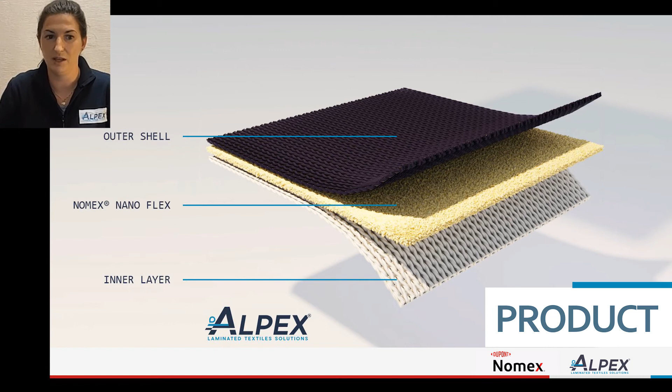Among the Nomex Nanoflex laminated range, the star products are the Nomex Nanoflex 430 LAM and the 335 LAM. These products were developed to bring innovative performances and additional protection to firefighters' hoods. These solutions allow the wearer to be highly protected while keeping much more comfortable than with a traditional PTFE membrane.

Now, let's focus on the advantages brought by these multilayers. They bring comfort through its moisture management, stretch, air permeability, and no sounds, noises, interferences. Also, protection by way of its flame and heat resistance, filtration efficiency. A focus will be made on fine particles and virus bacteria. And situation awareness through its limited rubbing noises and limited crackling noises.

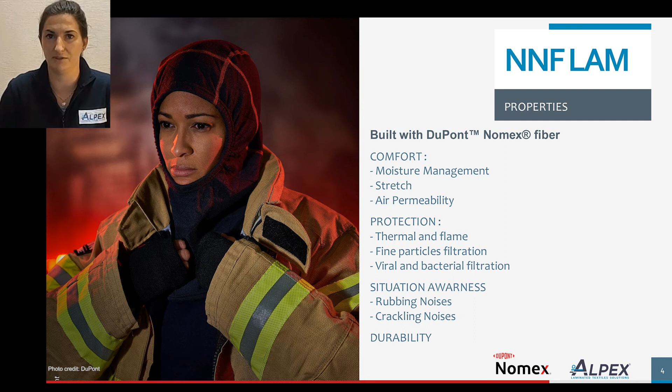According to the comforts, moisture management is an important point. We decided to combine hydrophilic and hydrophobic layers to increase moisture transfer and avoid condensation. The graph underlines the advantages of wearing a Nomex Nanoflex laminated hood compared to a traditional one. Also, as written on the slide, the water vapor resistance, called RET, is always under 7, which depicts the great breathability of the Nomex Nanoflex laminates. In other words, the sweat is removed quickly from the skin and evacuated across the material. Let's keep the wearer dry.

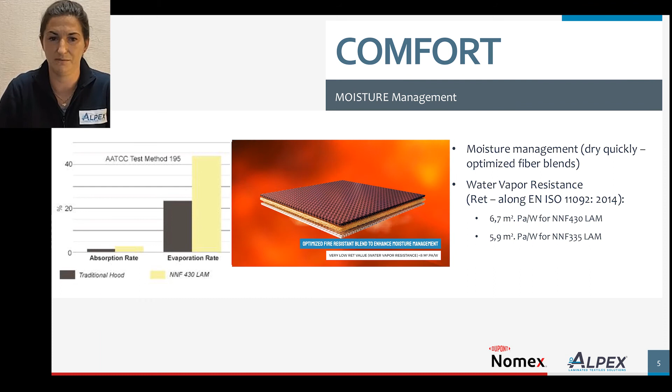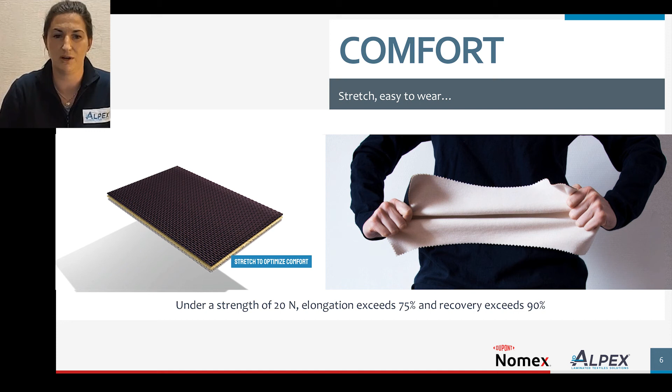Another great point for comfort is the elasticity. Our Nomex Nanoflex laminates are the stretchiest filtration barriers on the market. The wearer keeps moving without any trouble. Hoods made with these laminates are also much easier to don on and don off than membrane-based ones. Field tests with some fire brigades were made for 9 months. They concluded on the durability of the materials and that, despite these intensive trials, hoods kept their shape. Nomex Nanoflex laminates have the ability to keep its high filtration performances while being subject to an important stress.

The third advantage of these materials in the comfort topic is their air permeability. Nomex Nanoflex laminates are much more air permeable compared to the traditional hoods. As you can see on the graph, there is a huge difference between the two products. Our solution is around 40 times more breathable than traditional hoods using PTFE films.

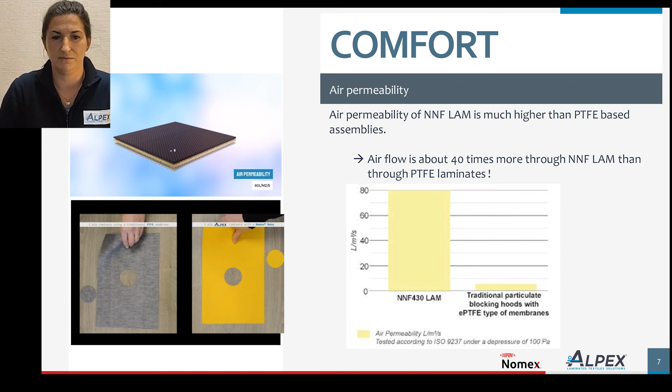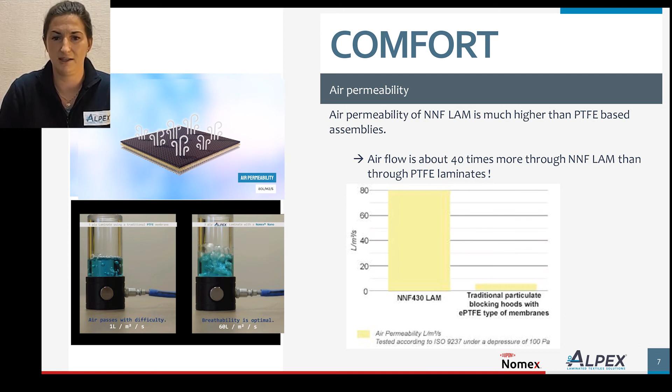If we now focus on the video, we designed internally a short test to highlight air permeability of different products. Air is sent through the material with a hand pumping ball. You can see on the right-hand side a Nomex Nanoflex laminate, and on the left-hand side a PTFE-based material. The result is obvious. We see much more air passing through the Nomex Nanoflex laminate than the PTFE material.

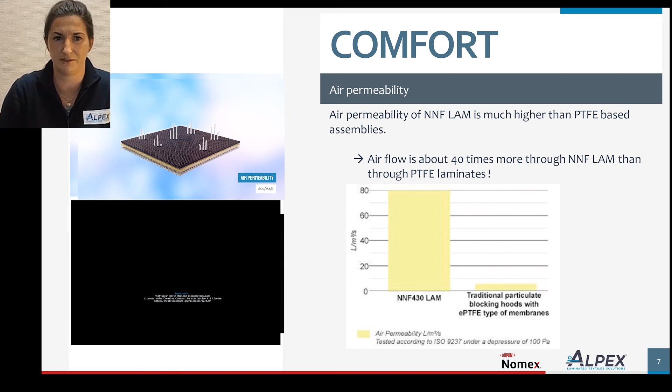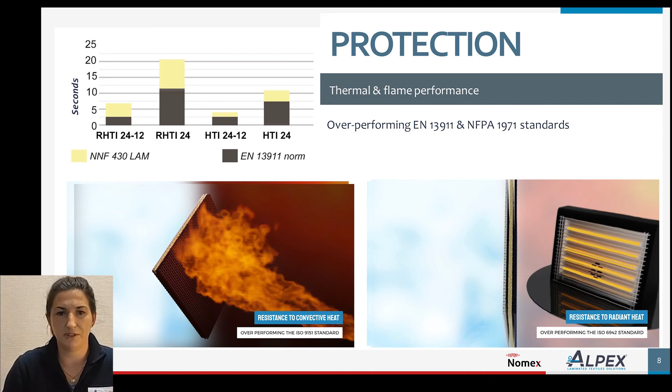After having seen comfort performances, we're going to turn our attention to the protection characteristics. As the previous topic, they are three in number. The first one is the thermal and flame performance. While being in a hazardous situation, firefighters are exposed to two kinds of heat, the radiant and the convective heat.

At the bottom of your screen, you have two different videos. On the left-hand side, the video shows the resistance of our product against the convective heat. Indeed, you can see our product exposed to a flame. Our product resists the flame and reduces temperature rising behind it.

The second video is the representation of the Nomex NanoFlex laminates exposed to a radiant heat, represented in red while heating up on the video. As for the other test, the product is used as a thermal barrier and avoids the temperature increasing too fast on the other side of the fabric.

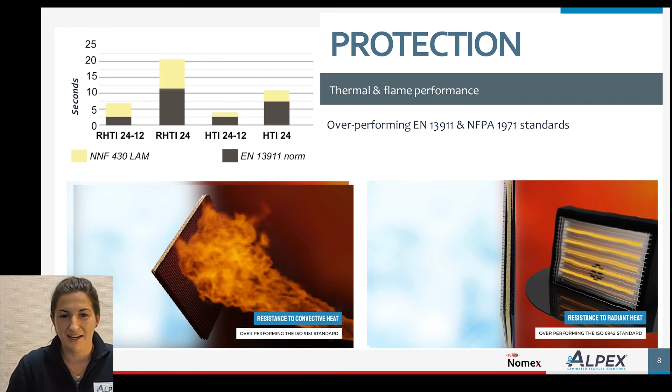Moreover, on the graph in the upper left corner, we demonstrate how the Nomex NanoFlex 430 LAM overperformed the specification of the norm. Indeed, the gray part represents the specification required by the norm, and the yellow part shows the performances obtained by our product. Nomex NanoFlex laminates enhance safety. The high thermal insulation of the Nomex NanoFlex laminates prevents burns.

Now, still in our protection part, let's focus on filtration efficiency. Smokes, generated by various types of fires, contain fine particles. In the following tests, the size of the particles tested was between 0.1 and 1 micron. In fact, recent research highlighted the risk of regular exposure to fine particles for firefighters. The neck and jaws area, where the skin is thin and wet, is exposed to particle absorption.

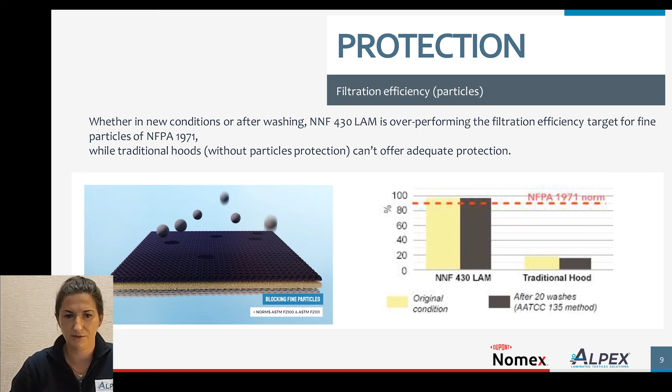Whether in original state or after 20 washes at 60 degrees Celsius, our Nomex NanoFlex laminates are overperforming the filtration efficiency described in the NFPA 1971. The video is showing the high level of particle blocking of our materials. Feeling good while feeling safe, a major step forward.

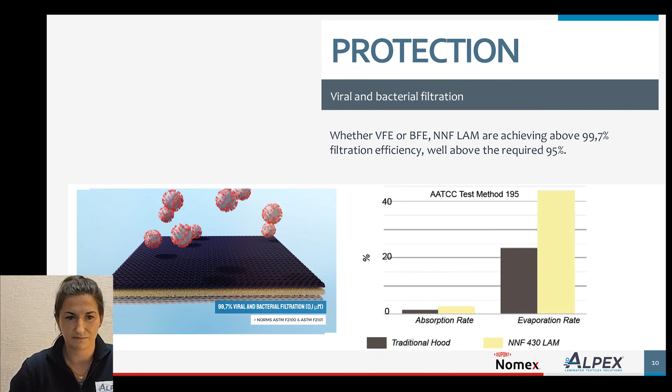Still in filtration efficiency, let's focus on viral and bacterial filtration. As described in the graph, the Nomex NanoFlex laminates passed the norm with 99.7% filtration efficiency, as for the VFE, viral filtration efficiency, or the BFE, bacterial filtration efficiency. You can see the product performing the norm in the video by repulsing the virus and bacteria.

Let's turn to the acoustic part, which is essential for firefighters to stay in touch with each other and with their environment. Situation awareness could be vital in specific situations. We characterized this parameter in a specific lab by two different tests, rubbing noise and crackling noise measurements. The goal is to represent noises which could be generated by the movements of the firefighter's head in its hood.

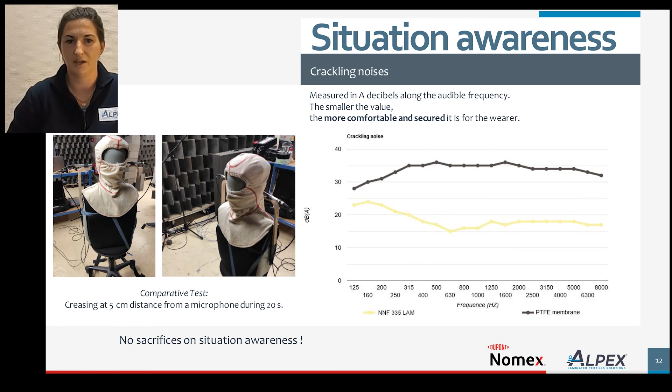For crackling noises, hood materials have been creased for 20 seconds at 5 centimeters in front of a microphone. As for the rubbing test, Nomex NanoFlex laminated materials are much less noisy when being crackled than PTFE materials. No sacrifices on situation awareness.

Dealing with the last characteristic, let's talk about the durability of the product. As I said earlier, we made field testing with the fire department. After 9 months of intensive use, we kept a very high level of filtration of particles whose size is under 1 micron. As shown on the graph, the black column represents a typical hood with no barrier, and the yellow one a hood made of Nomex NanoFlex laminates after field testing. As a result, we stay over 99% filtration for the Nomex NanoFlex, contrary to 40% for a typical hood in initial state.

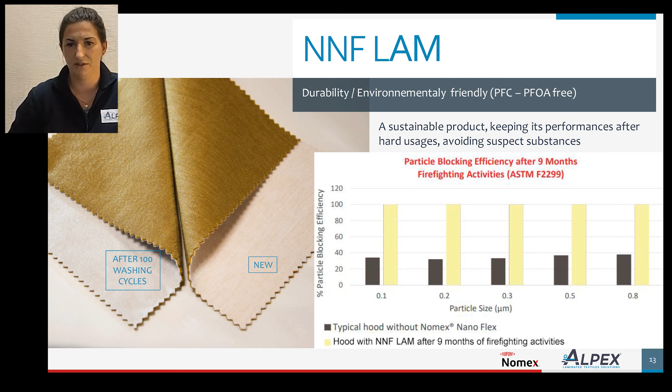Thanks to their specifically developed bonding process and bonding pattern, the laminated versions of Nomex NanoFlex are extremely durable and have been tested up to 100 washing cycles and still show no damage after 100 washing cycles. You can see the washing resistance on the picture. Through its specific construction, Nomex NanoFlex laminated barriers offer long-term protection. As a summary, I propose you dive into this short video.

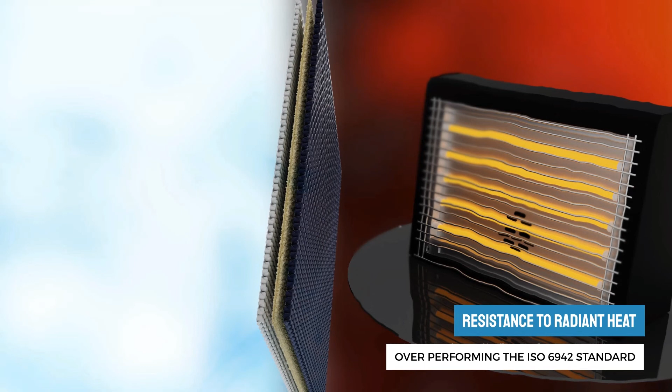As a conclusion, I wanted to underline that 2 of our star products are certified according to American and European norms, also known as the NFPA 1971 and the EN 13911.